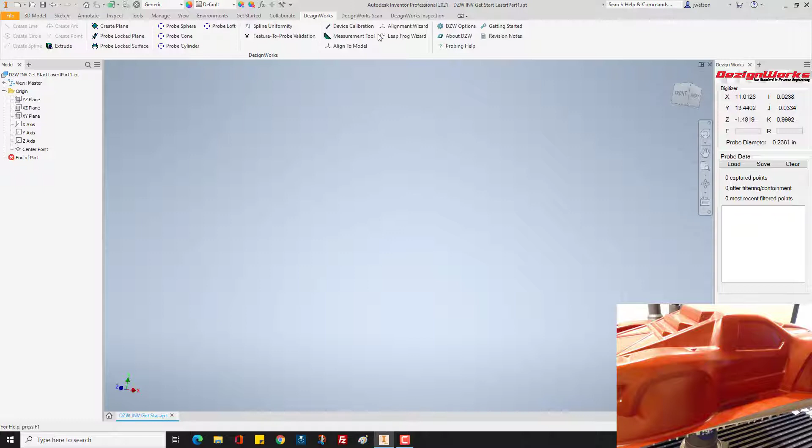The Getting Started video and the training with our team for probing talked about this in the very beginning. This is the Faro probe management. We're going to switch to the LLP in this case for the quantum. Take your mouse and select LLP, and we're assuming you've had training from Faro and know how to calibrate it. Normally this will be green.

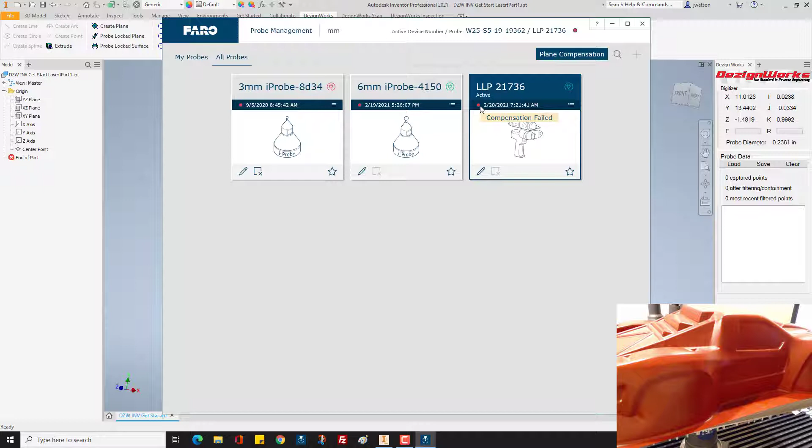About every 30 days it'll turn red. It's not that it's not calibrated, it's telling you they'd like you to calibrate every 30 days. Select Edit and we'll go over some of the settings. For normal parts, Automatic Normal works great. You can leave it on the movement filter selected and the reflection filter. You can leave it on scan 1:1 and scan density.

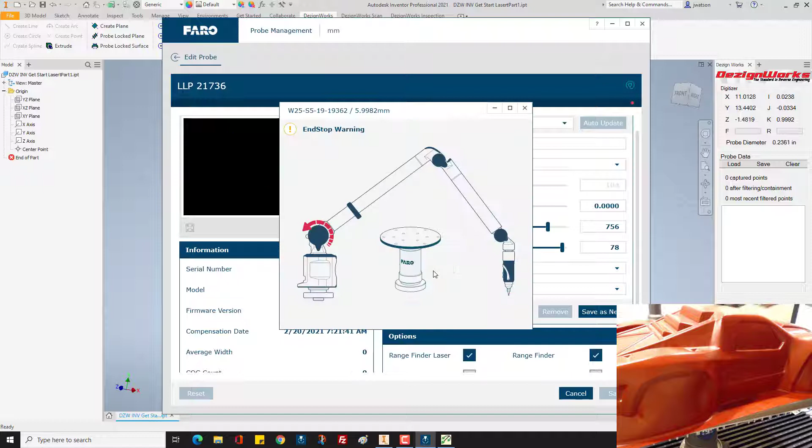Now to check how your laser is reacting with the material, grab the device, hold it over the part. You should see a solid line. If it's broken or you cannot see it, you may have to switch to the other types of algorithms.

For example, there's fixed. If you use fixed, it's for one color, and you have to switch some settings. HDR is for more shiny parts. Again, in this case, on parts like this that are painted, we're going to do normal.

Down here are some boxes, this is all personal preference. I don't like the rangefinder on, but I would suggest leaving the rangefinder laser on so you can see it. In some cases, you might need high precision if you're doing real intricate parts, and you could show the visible light. Again, this is all preference, but at the least you want automatic normal. These should be left alone, 1:1 is fine, the default, and rangefinder, then save.

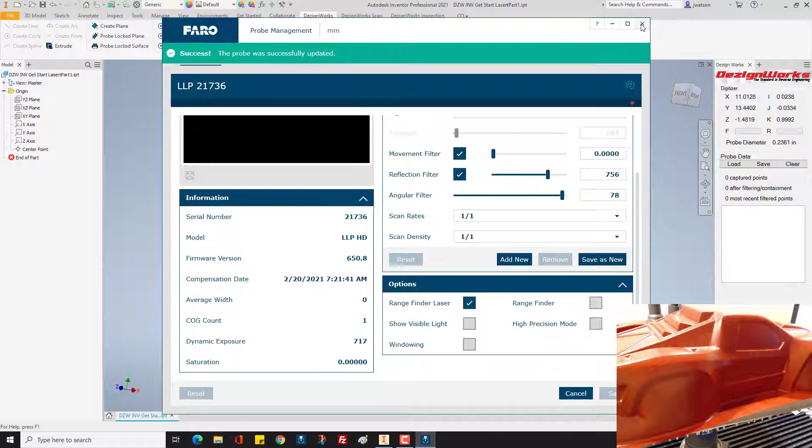Now what you'll notice is once you close this and move the device, this now was in probe mode. When you move the device, the readout's going to change and say laser mode.

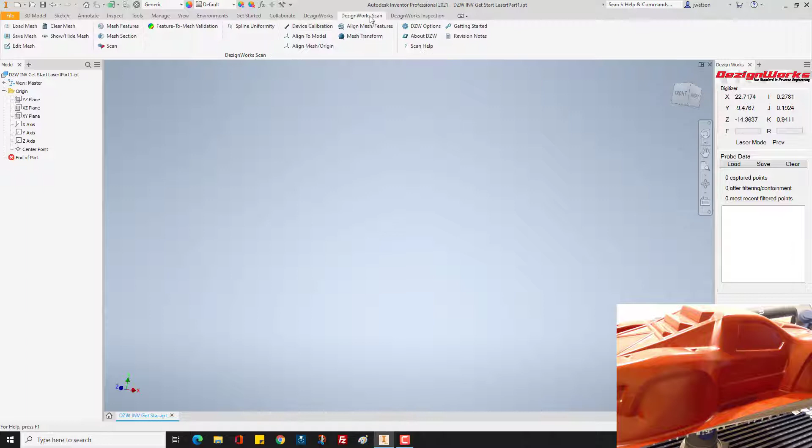In most cases, your part should be fixed, it should not move. In this case, we're going to show you in fixed mode on the Faro 8-axis table. So you'd select DezignWorks Scan, then select the scan. DezignWorks was created to make your scanning very easy.

Out of the box, the default triangle size is set to 30, a great area to start. Automatically show mesh preview and smooth mesh is on. View follow device is right now currently under construction, that's so it will follow what you're doing.

There's an advanced options, normally you can leave these alone. With the Faro, sometimes by default it's set to the middle. You might want to bump it up a little bit, but by default you really don't have to change anything.

So at this point, we're ready to scan. To go over this, triangle size: if your parts are about this size with no super small little radiuses and things, 30 thousandths will work good.

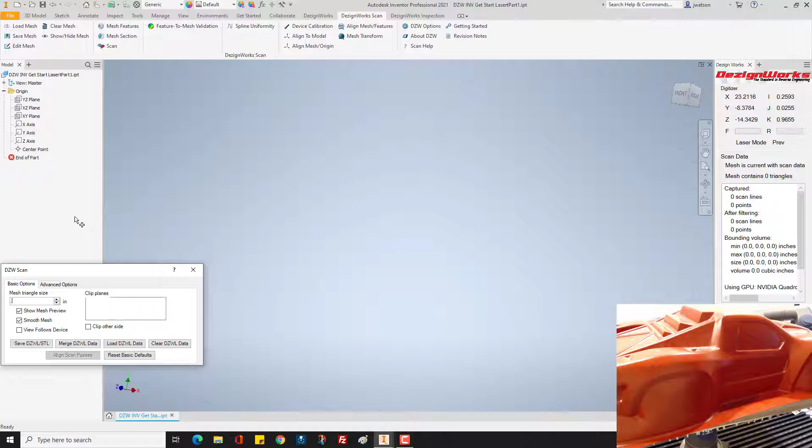But let's pretend this part is 10 feet long. We may want to bump up the triangle size to get a faster scan rate, and then we can adjust it as we go. So let's pretend this is like, say, 10 feet long, this bumped us up to like maybe 80 thousandths or even 100. This allows you to scan faster, but the resolution of the mesh may be lower, so you might not see full detail, but we can talk about how to change the detail. So put in the amount you need.

Now on the quantum, and most of the Faro devices, you've got a red and green button. And this is what the laser looks like on the HD with the Faro.

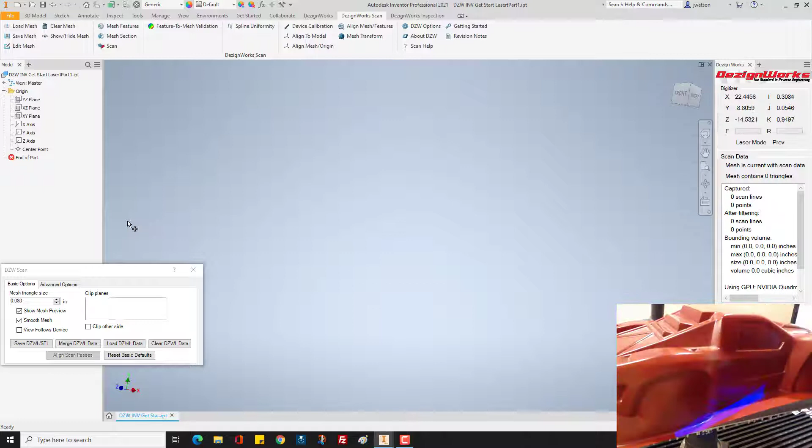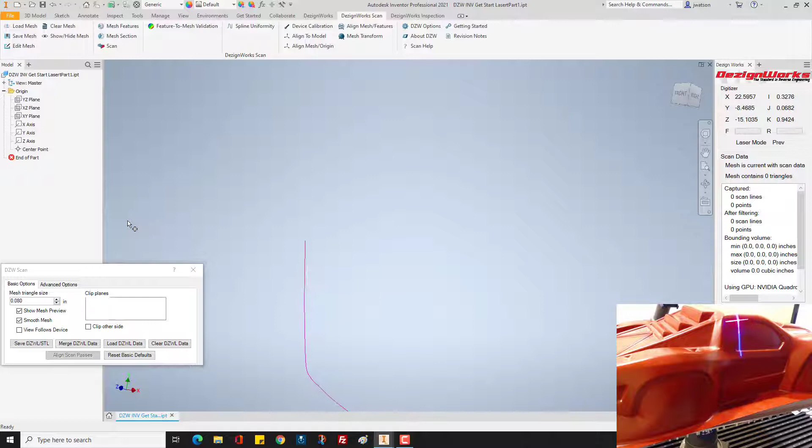Tap it to stop. So there is an active sound for the video. We're going to turn that off so it doesn't be annoying, but you'll probably want that on when you're working so you can hear what's going on, or you could turn down the volume.

I'm just going to stop for a second. If you want to know how to turn that down, go to DezignWorks options, or to turn it off, go to sounds, and we're going to say don't play a sound. We don't suggest you change this sound setting unless you really do not like that sound. If you do change it, make a short sound - it can't be something very long, it could slow down the process. We'll say save, go back to the scan tab, and all this is remembered.

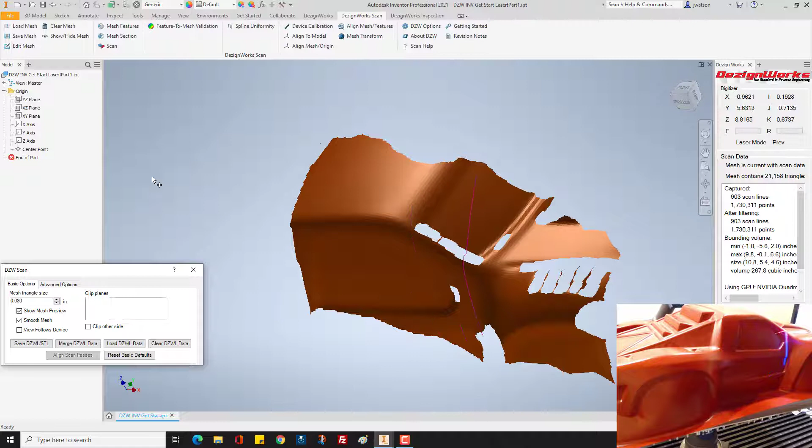Again, you're going to simply line up the blue and the red cross, tap the green button, and move along your scan. You don't really have to worry about backing up and overlapping. DesignWorks is set up so it automatically cleans up the mesh as you go over it. So this is about like spray painting - you're just going back and forth. To stop it, tap the green button.

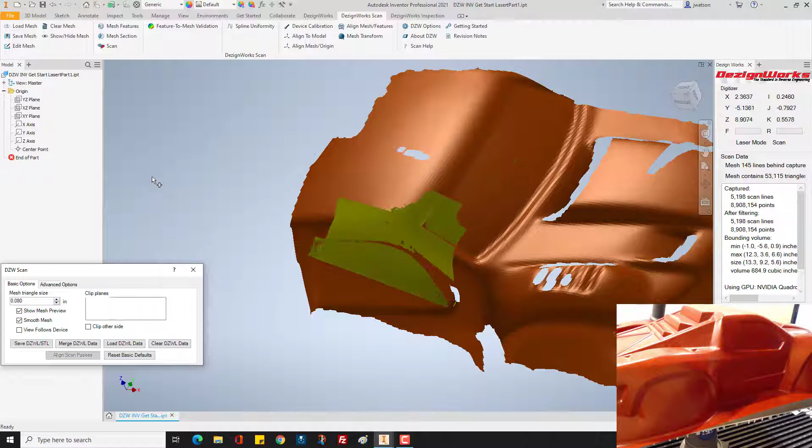Now what we don't suggest is you start scanning back here and just go back and forth and never stop. If you know you're going to be scanning back in the back part of this, and you want to go to the front, hit the green button to stop for a second.

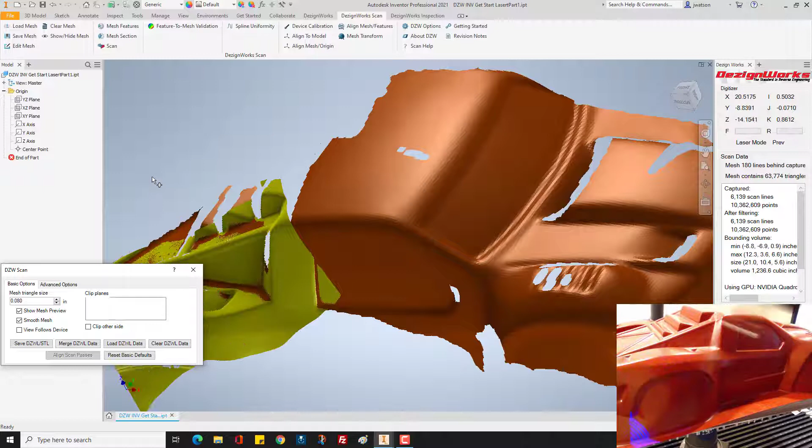Now what we're showing right now is fixed mode. So let's zoom out for a second. This is in fixed mode, like you didn't have the rotary table. Again, if you're scanning, tap the green button, and you'll see it on the screen as well as here. You don't want to get real far ahead of it. You'll see how it's in focus. Tap the green button to stop.

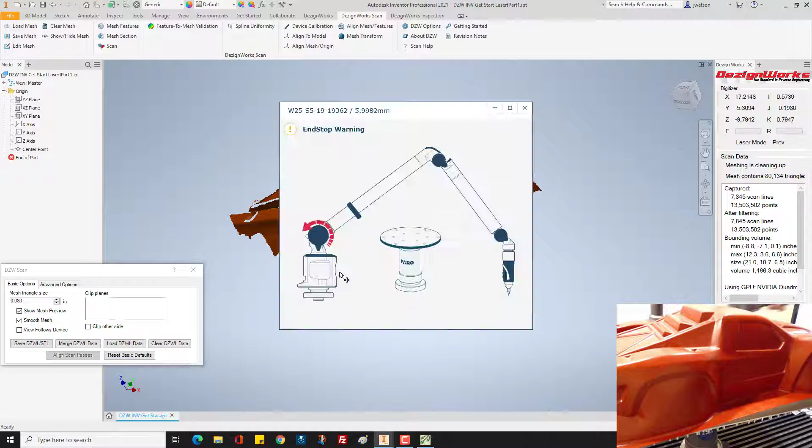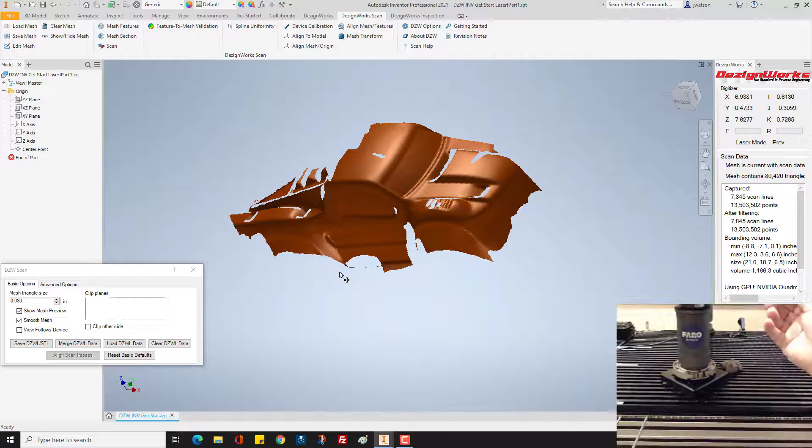So that's like in fixed mode. Again, the part should not move unless you have the FARO 8-axis rotary table. So we're going to go ahead and unfix the table and show you this. This is a great tool to have if you have a Faro device - it's a rotary table, you can spin the part on here.

It's very fast and efficient. You don't have to move around the part. So we're going to put the camera back up so you can see where we're working.

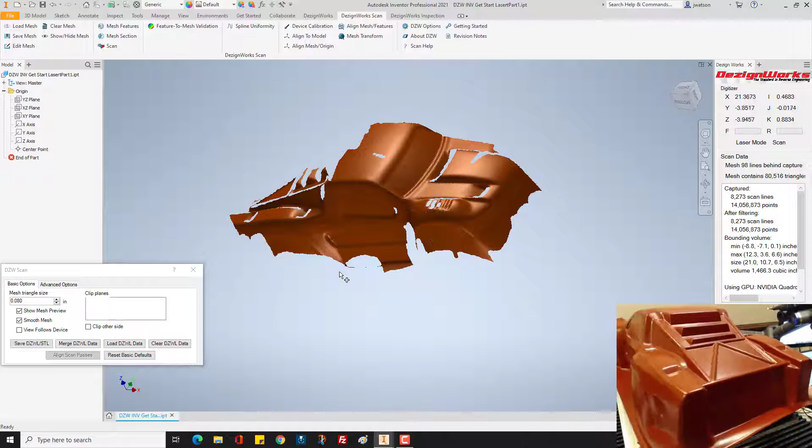Now we're going to assume that you've got an 8-axis. So the first part of the scanning was for those people who don't have an 8-axis. If you had an 8-axis, you do have to activate it - you go into the Faro management software and activate it. You would do this before you started. So with the 8-axis now, we can actually tap the button and actually spin the part. Works super great.

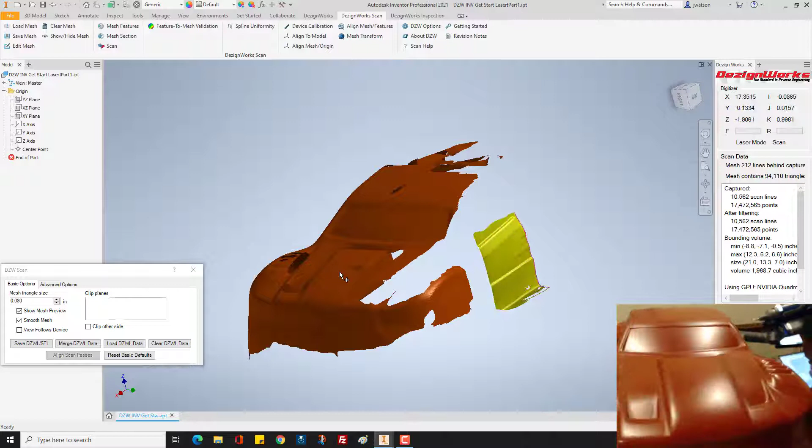So let's stop the video, the screen once and rotate it around. You can now see, without moving around all the part, you just simply move the table. So I'm just moving the table with my hand and moving the arm simultaneously.

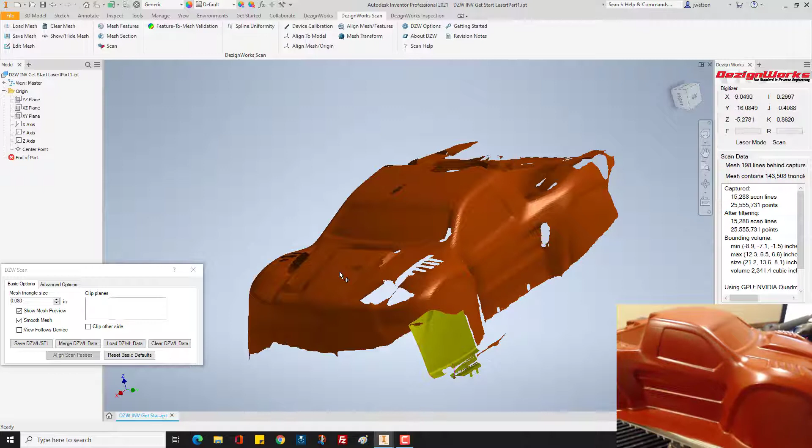Now as you're scanning, you want to make sure you'll see on the screen that pink color line, that you're not going way too fast. You'll know it when that happens - the line will be way out of sync. And if you want to stop turning it for a second, you could. Like here, this is to be rotated normal.

So what's that sound?

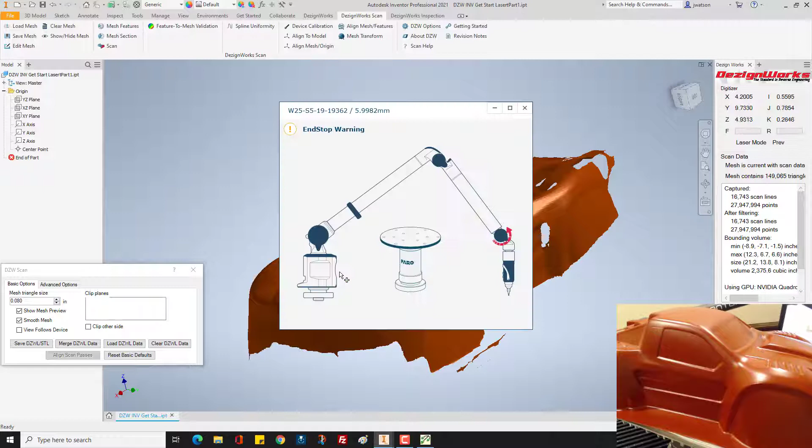Let's tap the green button once. The sound means you're on a stop on the device, so there's times that you can pinch it. If that's the case, move away from it so it's not on the screen. Here's what it looks like, means you're on the stop. If you're on the stop, you can't hit any buttons. Get off the stop, tap the green button.

So here we're going to relocate it. This is a single line scanner, so you do have to be normal to your part. So I tap the green button and continue my scanning. It's really this easy.

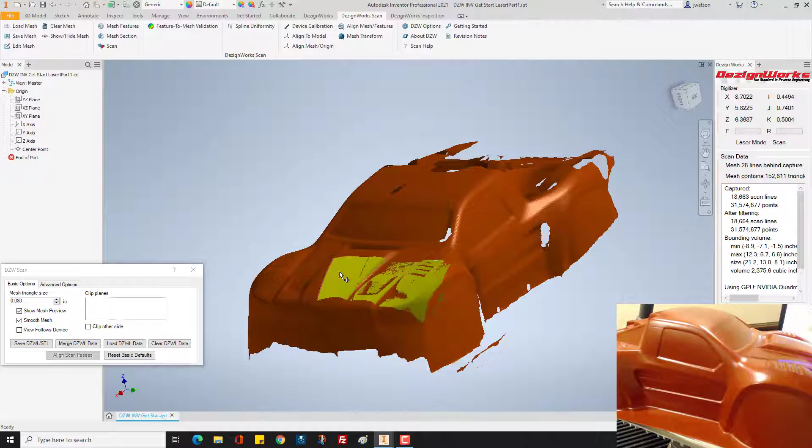There's lots of horror stories out there, point clouds and all the cleanup. We've eliminated that. So if I want to move to the back, I'd stop by hitting the green button. You could spin the table. So let's say you want to work on the back, we'll rotate it around the screen.

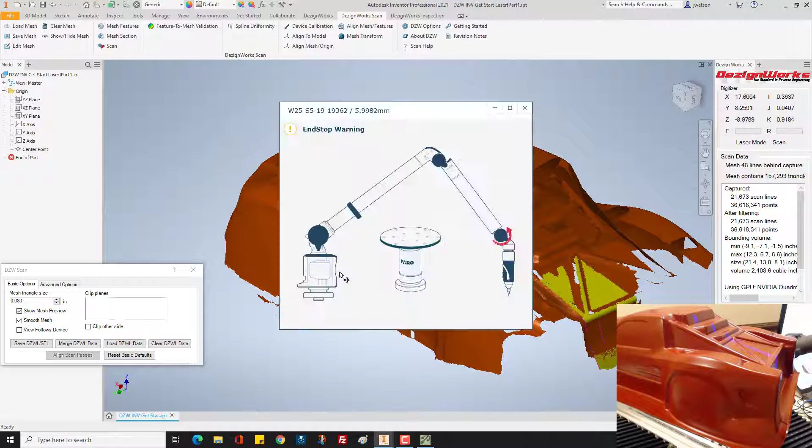We'll start scanning back here. Again, you're going to hold it normal to the part. I'll try to keep it in camera view most of the time. So there again, I'm on a stop, just make sure you're off the stop. Like here on these vertical faces, hold it normal. You'll see how much better it'll scan. If it's not scanning, it means you're not quite normal to the part.

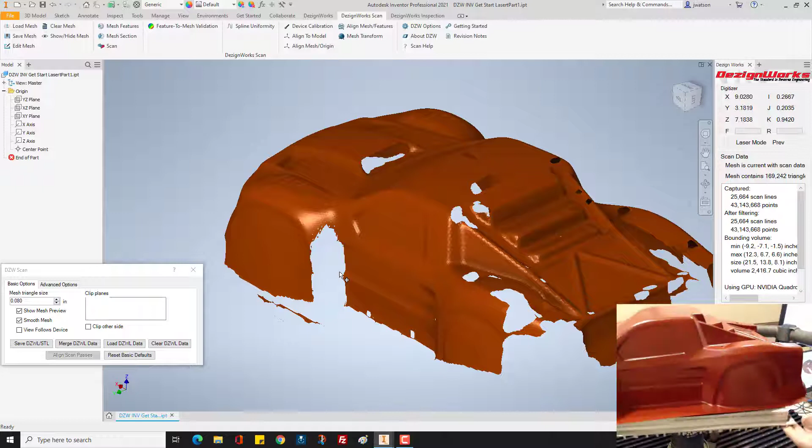So this part is about 25 inches long, 10 to 12 inches wide. You can see how fast and efficient you can scan. So here's the area we missed, right in here. We'll just turn it. Again, hold the scanner normal to it, tap the green button. It's really this easy.

Just continue scanning back and forth and looking to see where you miss. If you need to stop for a minute, tap the green button. Tap it to start. In most cases when you're scanning, you will not hit the red button.

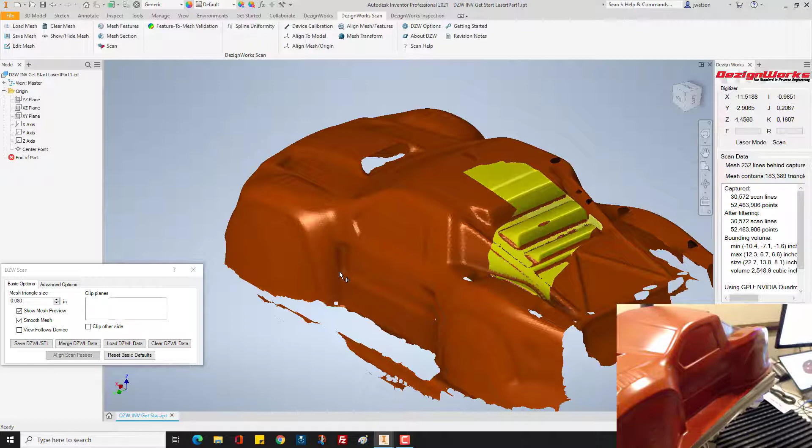So let's take a look at our part. You can see up front on the hood scoop, we weren't normal to it. So we're going to come back here, point normal to it, and scan. It'll get back in there.

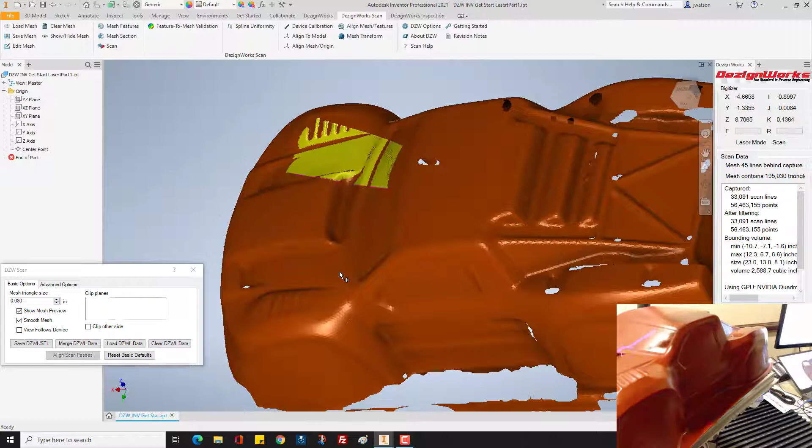But the 8-axis is so handy, you can spin it where you want. I'll rotate on the screen. Again, there's areas that I have to be normal to.

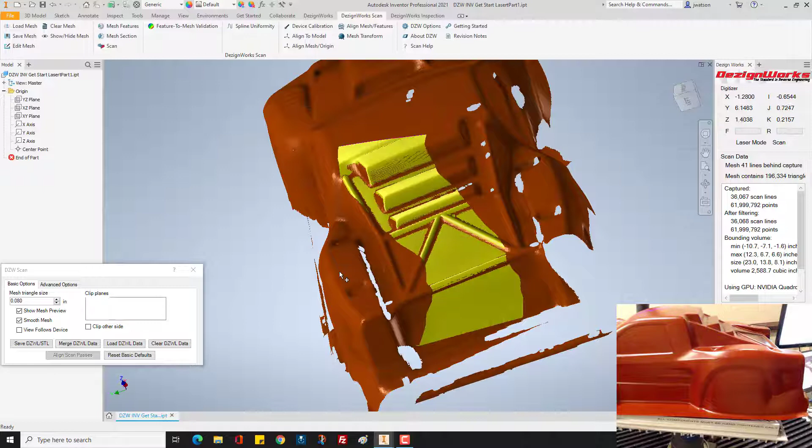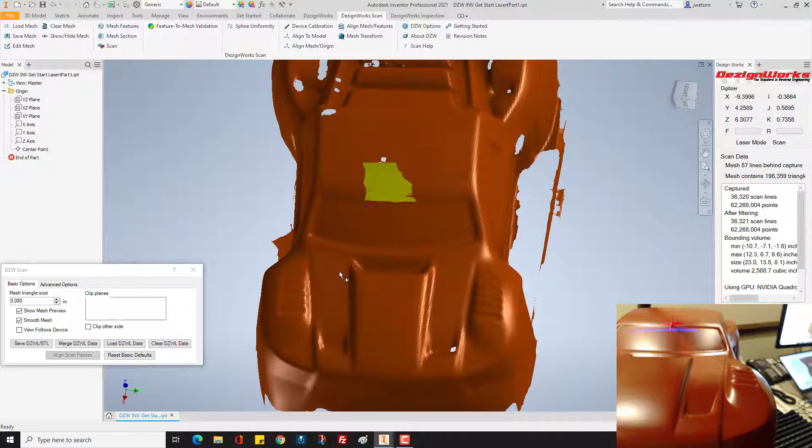So we're going to mainly talk about maybe modeling up a little bit of the front of this. We have a whole other video on how to model with this. This video is designed to teach you scanning. So these areas that we missed, we can turn the table, or if you don't have the rotary table, you have to move around it with the device. We'll get some of these areas. There's some undercuts down in here. So you can see how fast and efficient this really is.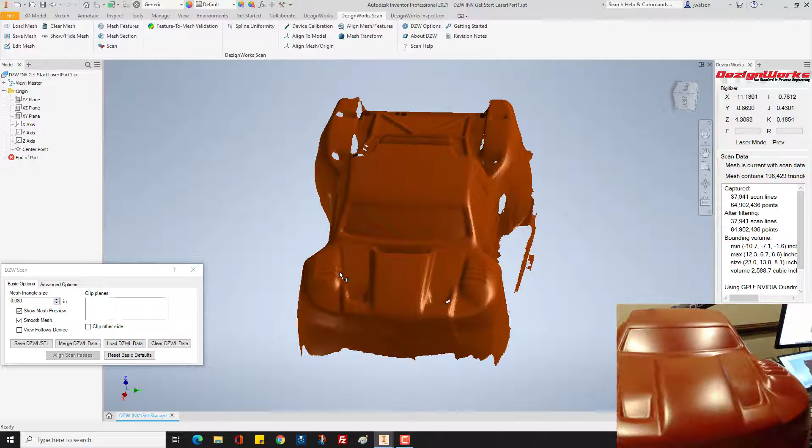So to go back over this: number one, if you don't have the 8-axis, the part cannot move. We have tools for merging the meshes, which we'll talk about later. If you have the 8-axis, make sure it's engaged, and then you can rotate your part.

If you have areas where it didn't pick up, normally it's either because of a color or reflection, or in this case, it's because we weren't normal to it. There's a cutout in here. Position your device over it. You can see on the screen the preview line with DezignWorks, or you'll see the preview line with the Faro. Make sure it's pointed normal, tap the green button, and start scanning. You sometimes just have to manipulate it back and forth to make sure you're normal to it.

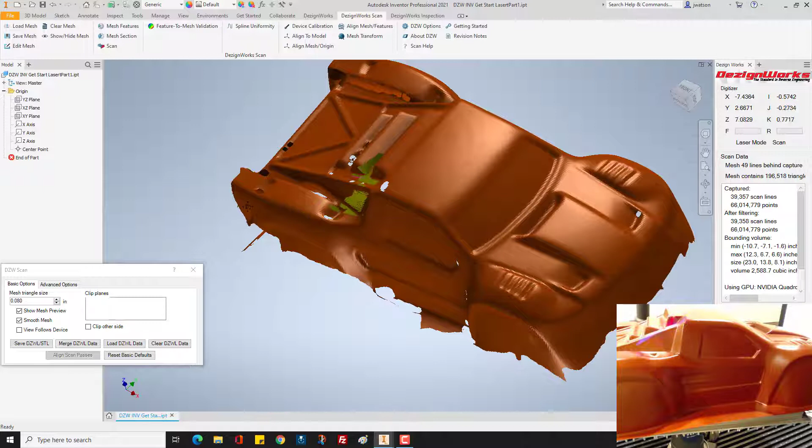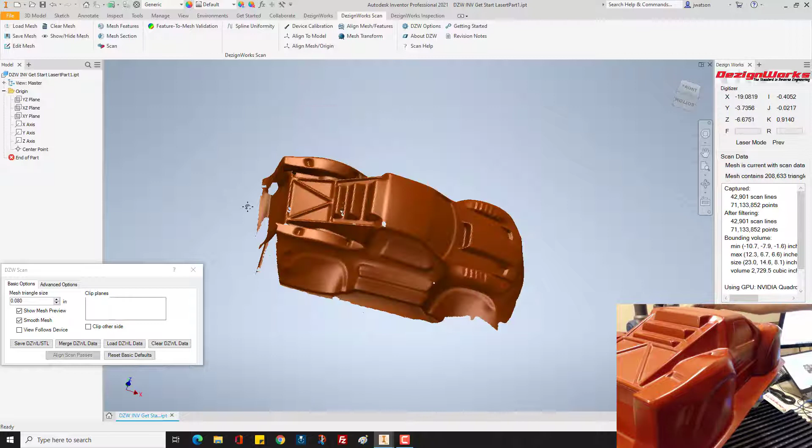So after you scan for a little bit, you do want to save your laser data. The laser data is called a DZWL. So down here in the scan box, save DZWL. We recommend you give it a name, and for referencing, what was the triangle size? For example, we'll delete this off. That's just a date stamp. My first scan at 080.

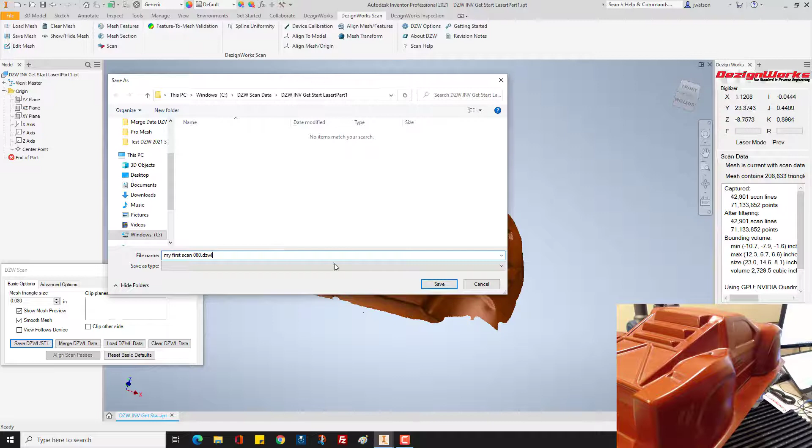Because it's saved separately from the Inventor part model, remember to occasionally save the DZWL so you can load this later.

We scanned this at a higher rate, so in some areas it's a little washed out. We were assuming it was like a 10-foot long part, and we wanted speed. Now that we've actually scanned it, in default scan mode it's scanning at a full rate. Turning down the resolution lets you go faster. We're going to put this down to the default, like 30.

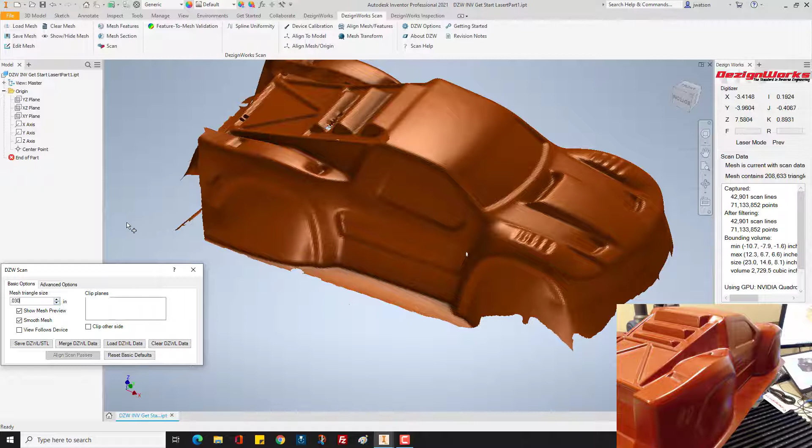In this case, we're in units of inch. We'll put in 0.030 and just tap somewhere on the screen with the left mouse. Notice on the right side, it's going to take and process this.

DezignWorks uses the GPU, so it's really important you have a computer with like 32 to 64 gig of RAM and a good graphics card with a minimum of 8 gig of RAM.

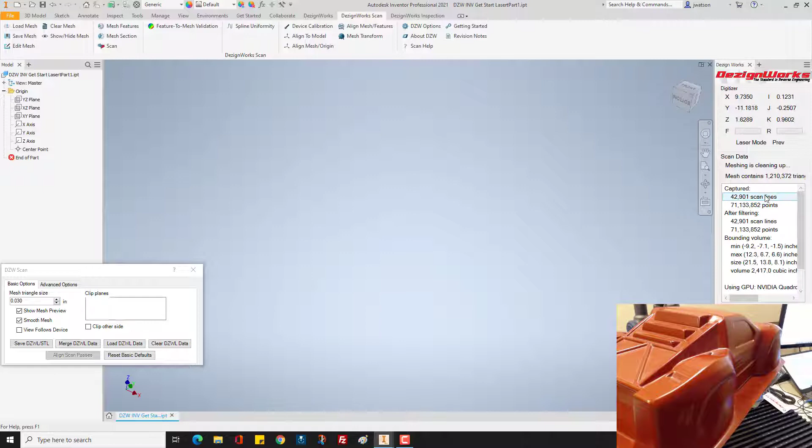So this is cleaning up. Notice it went from the small amount it was to 1.2 million triangles. Now you can see the definition on this is awesome.

So over here it says mesh is current, now you can work on it. While it says it's cleaning up, we don't recommend that you start moving it and going back through things.

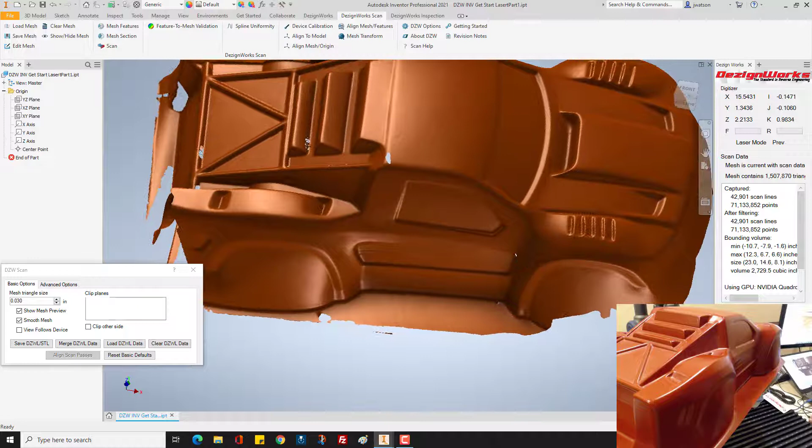Now in some instances, when you turn down the scan density and make it a lot more dense, you may have to come back and rescan some areas. Like here, a few areas are missing. So we don't suggest you rescan the whole part at a low rate, simply scan those areas. In here we missed some areas.

You don't have to worry about it remerging, DezignWorks does it for you. So all I did was tap the green button.

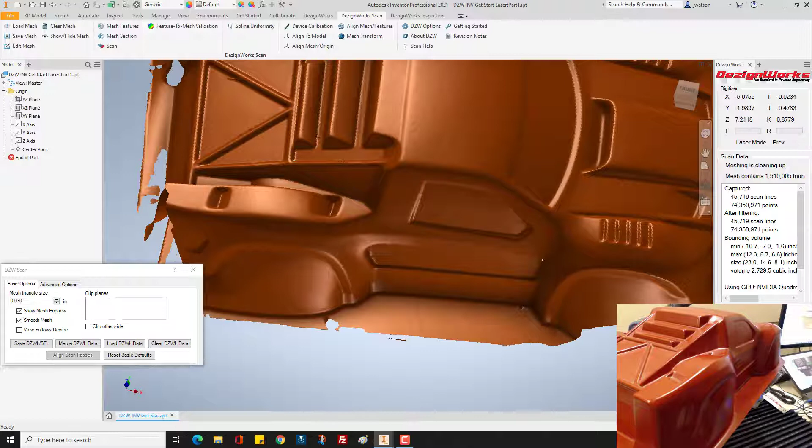Now you may have to go a little slower because the mesh is so big. Tap the green button, here's the areas you missed. Again, we don't suggest you rescan the whole part at this rate. When you had it set to 80, it scanned most of the part, but there's times when you make it smaller that it doesn't actually get all of it.

We'll rotate it around and look at it. There's some pieces on the other side we might want to get.

So here's an area it didn't get very good. Remember, the key is holding this normal to it. Tap the green button. It'll fill it in, it'll merge all that in right with the other data.

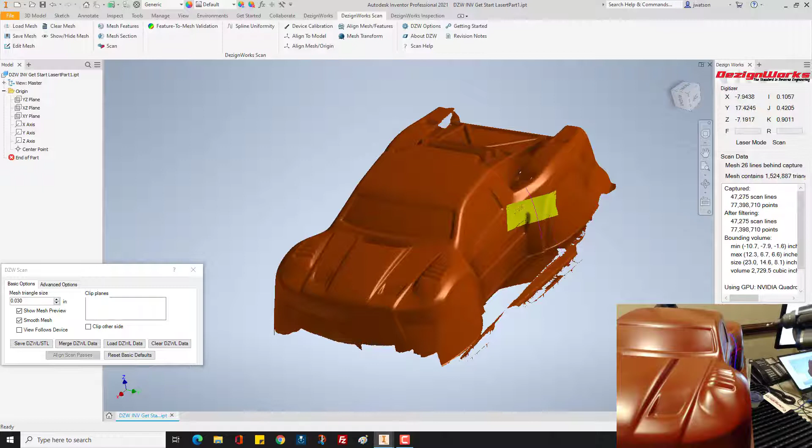Again, we might have to hold it normal this way, and we fill it all in.

So to review, you're going to open up the scan tab, and you're going to normally take defaults on small parts. If they're big parts, we change that to a bigger size.

Occasionally, save the mesh, it's called DZWL. In this case, we've changed it, so we're going to say save DZWL. Now, a lot of times you can actually select the one you had before and then just slightly change maybe the triangle size.

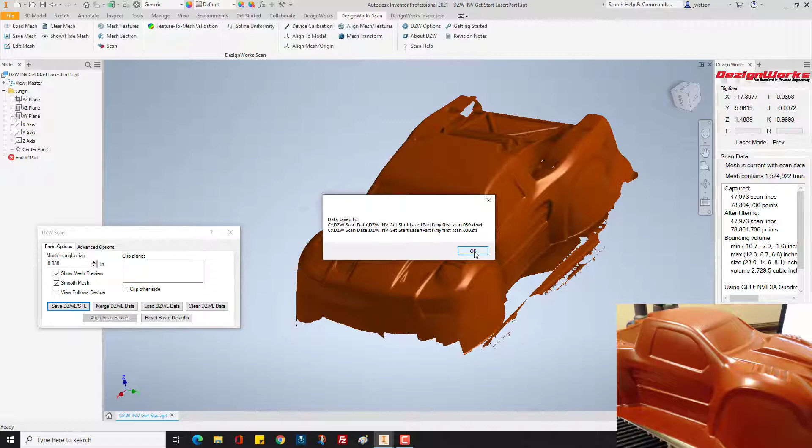Again, we suggest you put that number in there so when you come back in a few days or 6 months, you know what rate you scanned it at. So occasionally, save your DZWL during the process. If you missed areas, come back and scan those areas at the smaller rate.

Looks like we did a pretty good job.

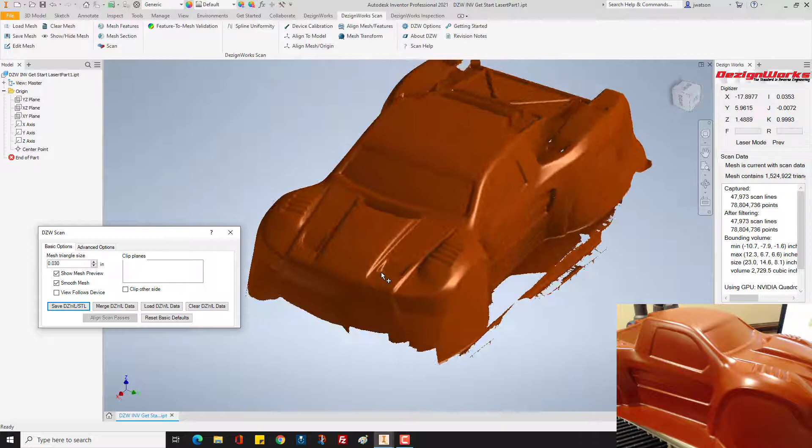You're going to want to watch the next video called Getting Started with Pro Mesh or Modeling with the Laser. This video is intended mainly for teaching you how to use a laser, how to change from the probe to the laser, and how to work with the DZW laser settings.

Your normal training for laser scanning with the Faro is 8 hours. We usually break that up into 1 to 2 hour sessions.